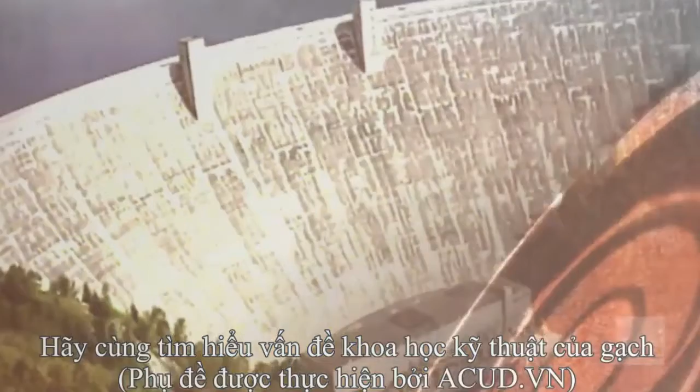It starts off as a simple block of clay. When put into fire, it turns hard like rock. This transformation has made brick a cornerstone of engineering for more than 9,000 years. Brick is virtually everywhere. No other building material is so central to our history. It gives rise to some of the most famous structures from antiquity, many of which still stand in defiance of time. It's mind-boggling in one respect because it's hard to realize that something can last that long.

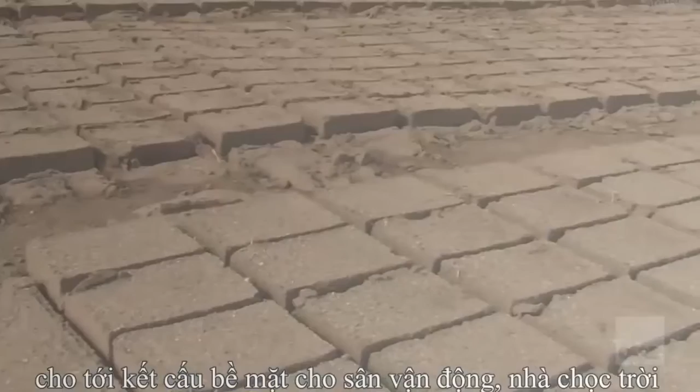When we pick up a brick and we think of how to use it in a modern building, it is automatically linked to the history of brick architecture and the history of city making. Today, brick continues to meet crucial engineering needs, from the strength for everyday structures, driveways, chimneys, homes, to the exterior skin of stadiums and skyscrapers. More than 9,000 years after its creation, brick remains an essential material in construction. I mean, it's an incredible material, brick, and I never cease being fascinated by it. I never cease being amazed at what is done with it.

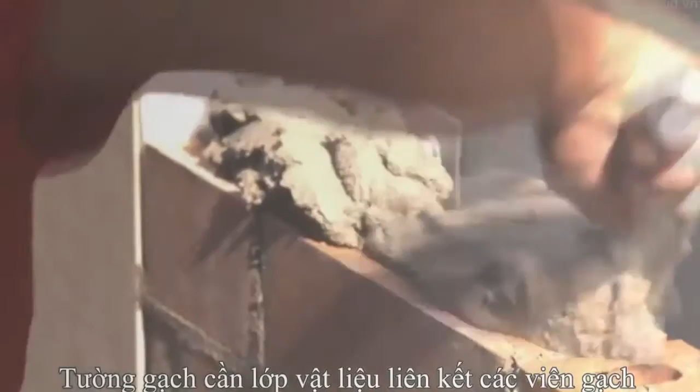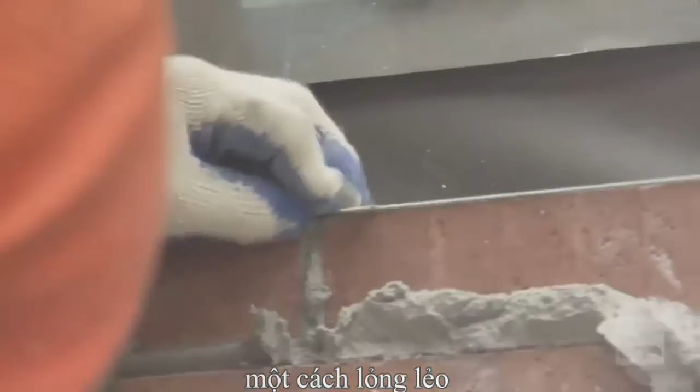Strong, resistant to the elements, virtually fireproof. Brick is prized for its attributes. But brick construction also has a central weakness: mortar. Brick walls need an adhesive agent to bind the blocks together. Without mortar, a wall is nothing more than a collection of bricks stacked precariously on top of each other. Brick and mortar go together like bread and butter.

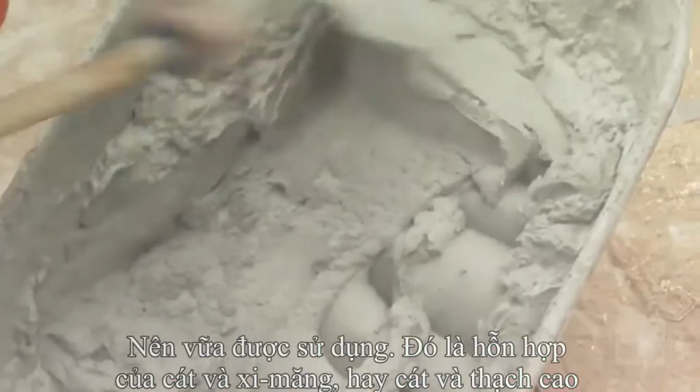You need mortar to lay bricks in because it's difficult to lay them dry and they've no ability to stick together. So one uses mortar, which is sand and cement or sand and lime, an adhesive almost, to keep the masonry units together. Mortar is the glue that holds bricks together, but it is also brick construction's greatest weakness. When brick structures encounter a strong force from the side, the mortar goes under stress. It can begin to crack. The bond with the brick can fail.

Nowhere is this weakness more evident than in an earthquake. The swaying of the earth can cause mortar joints to fail. The results can be tragic. Many of the brick buildings built here in the United States are not reinforced or designed to sustain seismic or earthquake loads. They don't like to be shaken around. They don't like to be moved. They don't like vibrations so much. It's not a matter of if, but when. If it's a major earthquake, most engineers and architects agree that some buildings will fail in some manner.

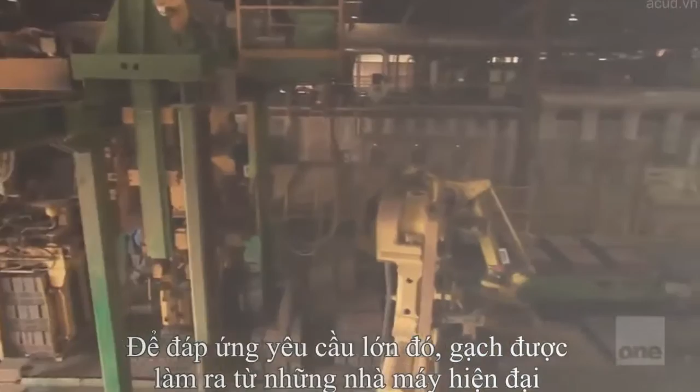Even with this inherent weakness, the demand for this ancient building block continues to grow. Each year, 10 billion bricks are produced in the United States alone. To meet the massive demand, most production is done in state-of-the-art factories. Inside plants like Redland Brick in South Windsor, Connecticut, nearly 50,000 bricks are produced each hour.

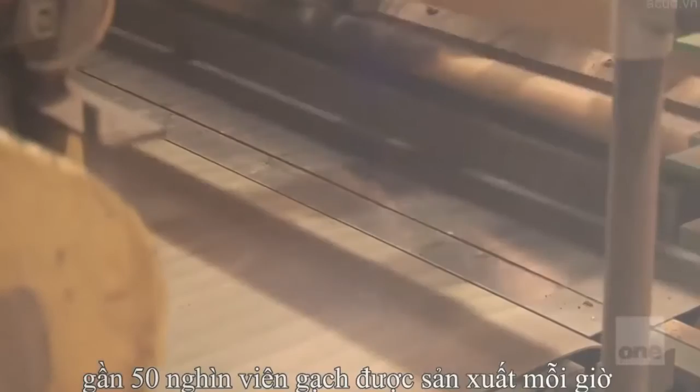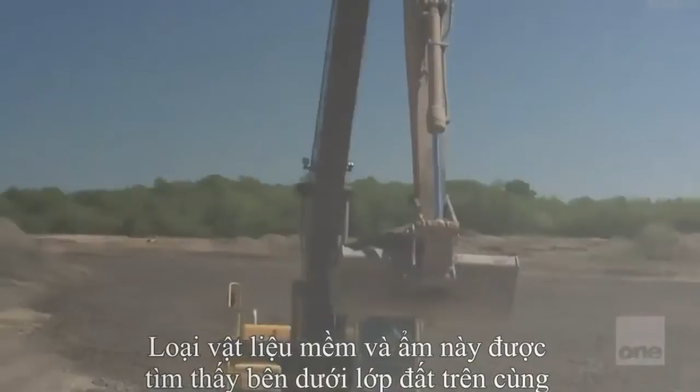While technology now drives production, the basic ingredient for creating brick has been the same for centuries: clay. Clay is the soft, wet earth generally found under the first level of topsoil. It is available in virtually every corner of the world. Clay is the same material that gives shape to pottery. But that does not mean all bricks are the same. Select different clays that contain certain minerals, and bricks can be customized for specific traits of color, weight, or strength. The possibilities are vast.

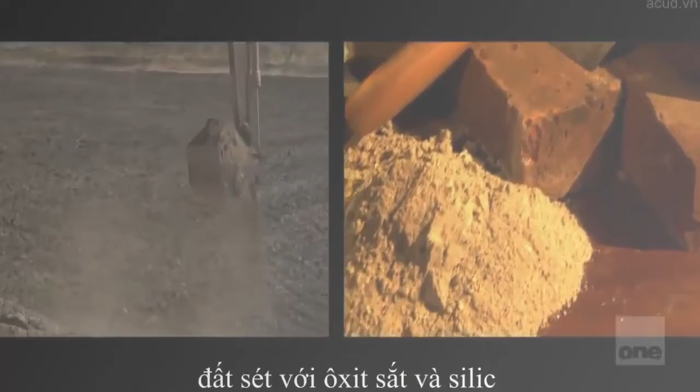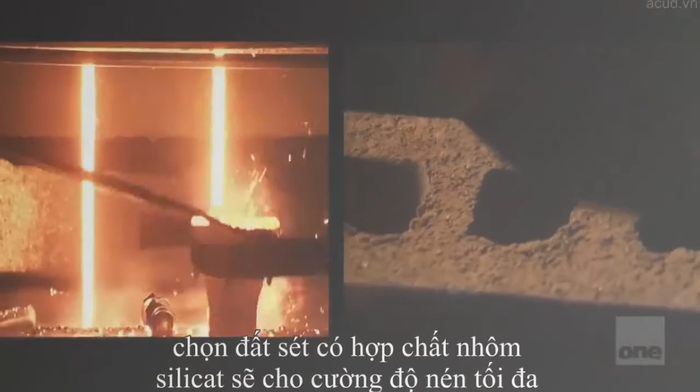Looking for a material that can insulate a furnace? Mine a clay that has iron oxide and silica for maximum resistance to heat. Need a strong material for an industrial factory floor? Select a clay with aluminosilicates for compressive strength. Picking the right clay is a crucial step in brickmaking.

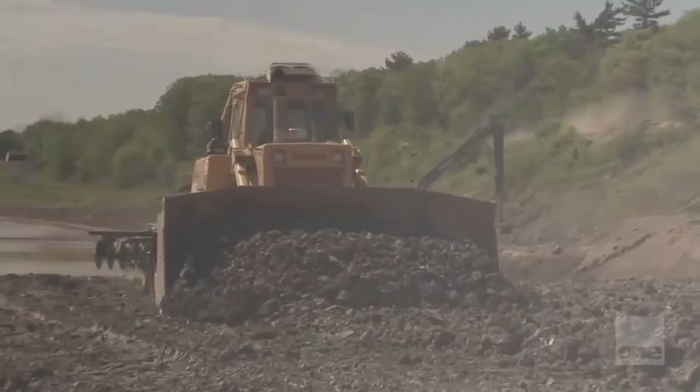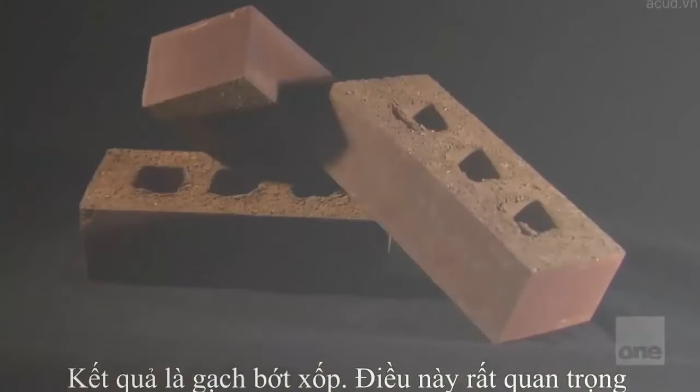Once mined from the earth, clay must be formed. For centuries, humans meticulously created bricks by hand. Today, machines called extruders shape clay. As it's formed, tiny air pockets are pressed out. The result is a block that is less porous. This is crucial. In that process of squeezing that clay out, they actually take the air out of the brick, and that takes out the voids and makes the brick stronger and more water resistant.

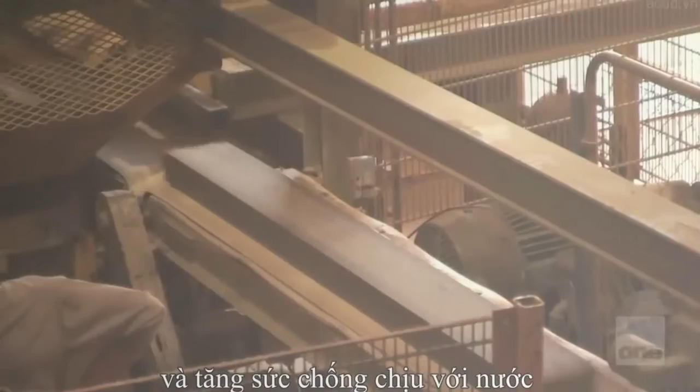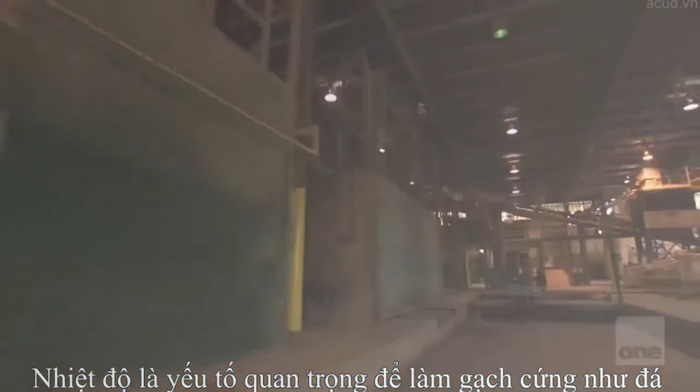But to convert clay into brick, it must be fired. Heat is the crucial element that makes it rock hard. Inside these modern kilns, bricks bake at temperatures of at least 1,600 degrees Fahrenheit. At this heat, a transformation takes place. The moisture content inside evaporates. Clay particles start to fuse on the molecular level. This bonding of particles is called vitrification. It turns soft earth into the solid, rock-hard, essential building tool we call brick.

Firing bricks requires precision. Bake them too hot or for too long, and the clay literally melts. Not hot enough or not long enough, and you've got a fragile, brittle block. Useless. Modern kilns monitor each variation in temperature. This attention to quality ensures that each brick will be strong, durable, and aesthetically pleasing. Now, go back inside the science of brick.

The Great Wall of China. It stretches nearly 4,000 miles. It cuts a path through the heart of a nation. And the strength behind much of this structure, an estimated 3 billion bricks. But this epic barrier almost didn't stand at all. Centuries after it is first built, the wall begins to crumble to the ground. The mud bricks that give it strength are no match for the elements. The edges of the brick would slowly disintegrate, and then the whole thing would basically turn back into mud and go back into the earth where it came from.

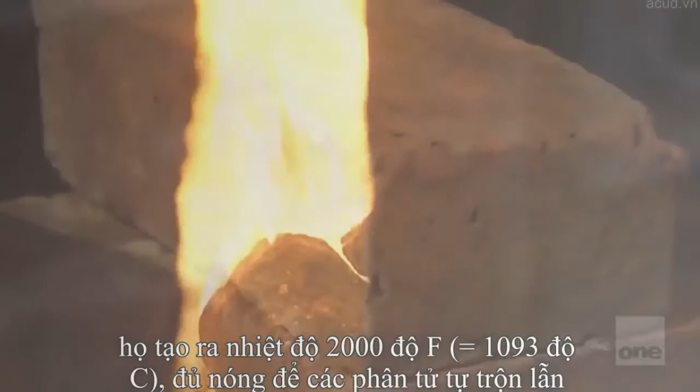To build a new wall, China needs a stronger brick. They turn to a new material, clay. Less porous than mud, clay bricks are more resistant to penetration by moisture. But sun-dried clay will not be enough. They turn to a crucial element, fire. For at least 3,000 years, the Chinese made pottery by firing it at high temperatures in kilns. They decide to employ the same technology to create brick. By firing the clay in kilns, they can heat it to nearly 2,000 degrees. This allows the molecules to fuse. The result is a hard block that is resistant to the elements and is also able to sustain tremendous weight. The Chinese have a formula to rebuild the wall.

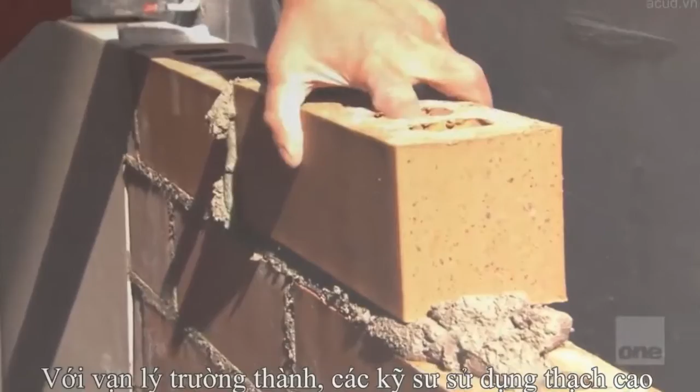The leap here is looking for something much more permanent. What is strange is how long it takes for this step to be made. And it seems to take a very long time for it to occur to people to fire bricks, building material, rather than just bake them in the sun. To give the wall greater strength, the Chinese also focus on how to bind the bricks together. The choice of a strong and reliable mortar is essential. In the Great Wall, engineers select a formula of burnt lime and sticky rice gruel. The two components act like cement, sealing the bricks together. Locals dub it the mortar that lasts for as long as 10,000 years.

Brick by brick, China restores the largest man-made structure on Earth. The wall as we know it today is finally completed in approximately 1640. More than 300 years later, the wall's clay bricks have stood up to the elements. The very stamps pressed into the clay by brickmakers all across China can still be seen in the finished product. The wall stands as a testament to their skill and ingenuity. The Great Wall of China is still standing. It's made of brick, and it's still standing. China employs brick to its full potential for protection.

Across the world, another empire transforms it into a backbone of everyday life. Romans employ brick to erect stadiums, temples, and even bathhouses. Brick has a remarkable quality that it can be used in incremental ways, so it can make an arch. The Romans were really the first to explore this. They were the first to really take it as an intellectual art. How far can we push this simple material? Way past adobe making, but to heroic architecture. Today, this structure still stands as a testament to the power of ancient Roman brick construction. Trajan's Market.

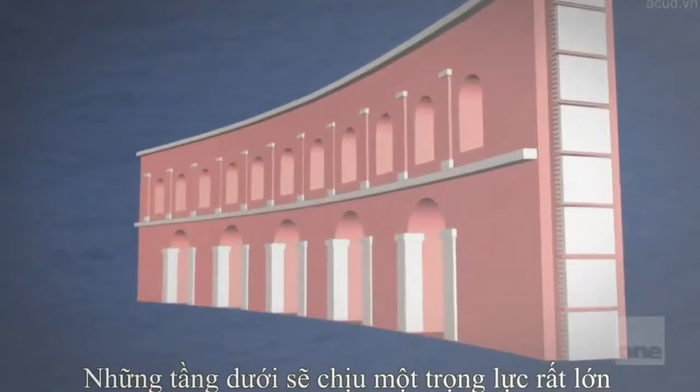The design for the market calls for a 6-story complex. This means the lower floors will bear incredible weight. In the ancient world, brick is the ideal material to support such mass. The brick strength is tremendous. You could stack brick 100, 200 feet tall. It will sustain the weight of itself. You could stack 6 or 8 cars on top of a single brick.

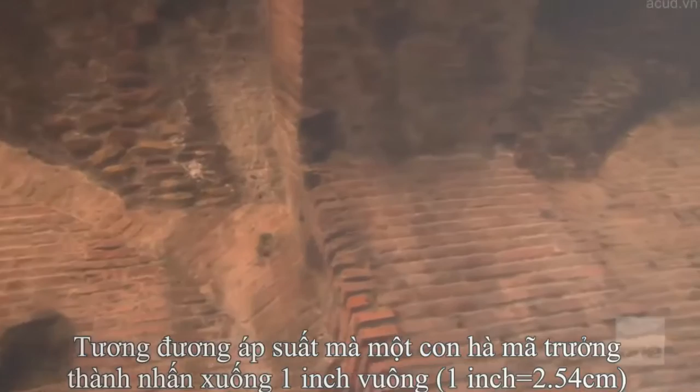It will not crush. The average Roman brick can sustain approximately 5,000 pounds of pressure per square inch. That's the equivalent of a hippopotamus pressing down on every single inch of it at once. Even modern concrete is only required to support 2,000 to 4,000 pounds per square inch.

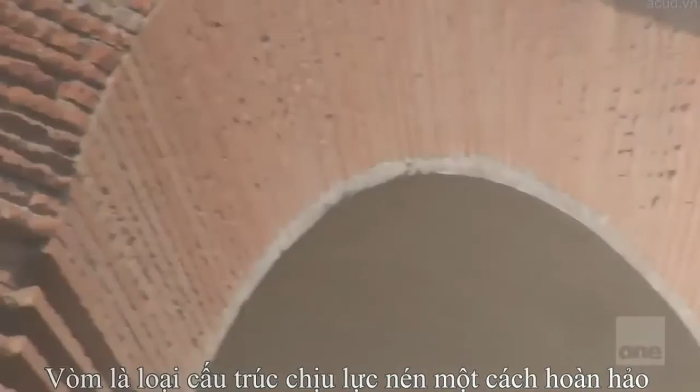To further increase the brick's ability to sustain the load, the Romans turned to another architectural innovation: the arch. When we think of the Romans and how they contributed to brick construction, the first thing that comes to mind is the arch. The arch is essentially a very perfect compression element. It's a very clever way to force masonry to work in compression only.

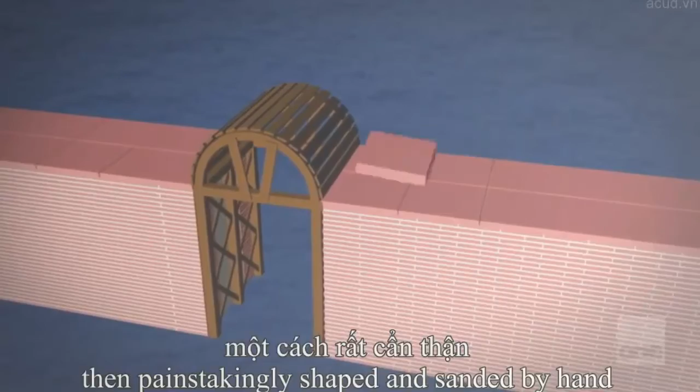To create these arches, bricks are carved into wedges, then painstakingly shaped and sanded by hand to precise measurements in order to fit securely. Nearly 2,000 years later, you can still hardly fit a playing card between the bricks. But the greatest innovation in Trajan's market is a secret inside the walls.

Roman bricks are not the same blocks used by the Chinese. Long and square, they resemble thick tile more than anything else. By cutting these bricks like a pizza into halves, quarters, or even eighths, Romans create a formula for incredibly stable walls. The outside of the wall is straight and flat, but this is just a facade. Behind it is another material that gives it even greater strength: concrete.

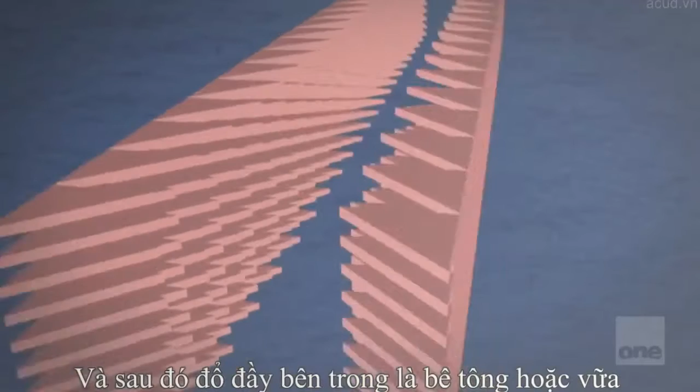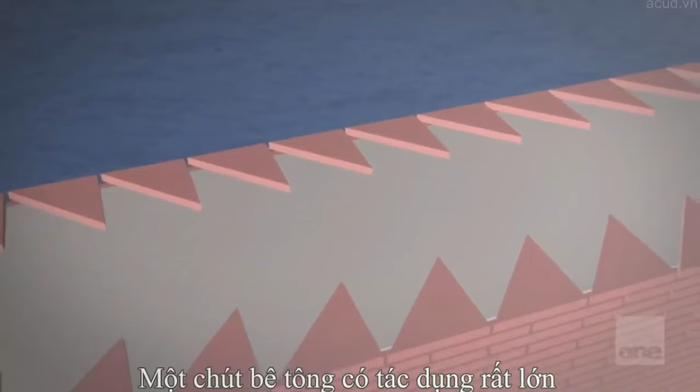They'd use this face brick, arches and stacked brick, and then they would fill the inside of the walls with concrete or grout. The jagged, sharp edges of the brick triangles bond perfectly with the concrete. So each little bit of concrete had a place to put his thumb and forefinger, so it gave it a mechanical retention as well as just an adhesive retention. It's just good engineering. What this did, in essence, is create a composite wall, brick and concrete, and they gained more strength still. Brick's compressive strength combined with the use of concrete allows Trajan's market to become an ancient high-rise.

Now, go back inside the science of brick. London, England. This legendary city turns to brick to overcome one of the greatest disasters in its history. In the process, London redefines how this material will be made and used.

September 2nd, 1666. Flames engulf London. Over 3 days, the losses are staggering. 13,000 houses, 87 churches, and countless businesses. The city lies in ashes. As Londoners clean up the wreckage, they notice something amazing. The flames that rage through the city stop right here.

This is part of the ancient city wall. It is made of brick, and it is entirely unharmed by the flames. In fact, seemingly every time the fire reaches a brick wall, it stops in its tracks. The reason? Brick is fireproof. When clay is fired in a kiln, the particles inside fuse together into a new molecular structure. The result is a rock-hard substance that will not melt unless it is pushed to more than 2,000 degrees.

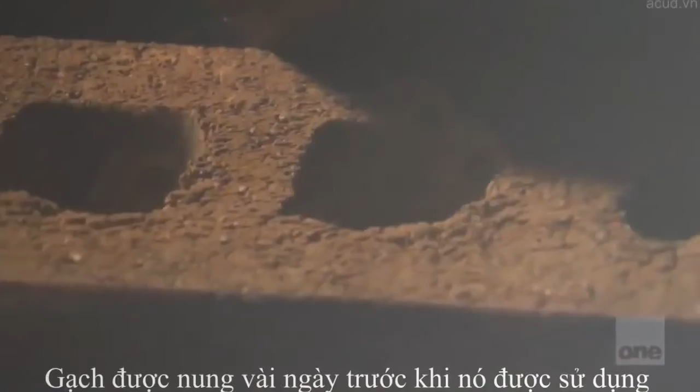In essence, brick is virtually immune to typical fires. It's already been fired in a furnace for days before you ever get to use it. So its properties were actually gained by its thermal sintering of the components together. And so you come along and heat it back up to the kind of temperatures of a kiln, which would not be uncommon in a fire. It sort of says, oh, back in the kiln.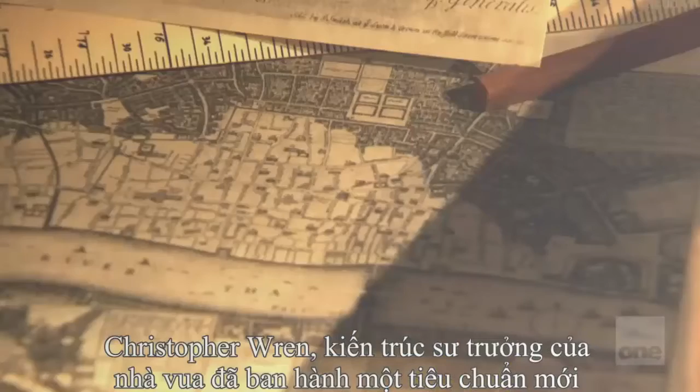In the wake of the London fire, Christopher Wren, the chief builder to the king, imposes new regulations on all reconstruction. Every new building must be made from fireproof materials. London turns to brick. People wanted to use fireproof products that could withstand any kind of catastrophe that would come around. But the city also needs to build quickly.

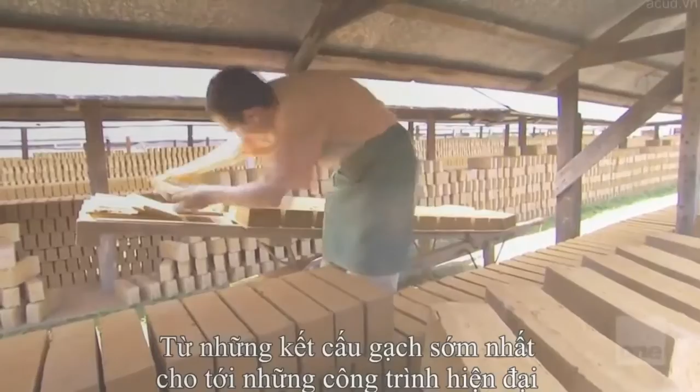Brick construction is incredibly time-consuming. From the earliest brick structures up to the modern day, each building has gone up the same way. Brick by brick, each one painstakingly laid by hand.

Typical square blocks make progress even slower. There's beauty in the shape of the brick, which comes from a supreme economy. Some of the early bricks would typically be square, but square brick isn't terribly efficient. London looks to a different shape of brick, rectangular.

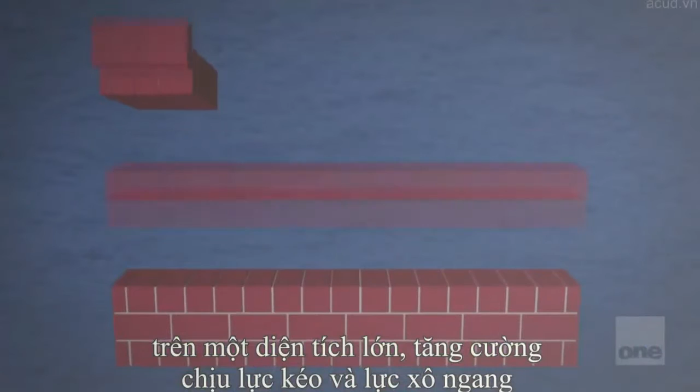Able to fit in a human hand, these rectangular blocks permit masons to raise structures quickly and efficiently. This shape also brings an added benefit, strength. The rectangular shape allows one brick to lay directly across two bricks below it that are facing in another direction. This stacking system gives walls bond patterns that distribute weight over a larger area, increasing both compressive and lateral strength. From churches to hospitals to private homes, brick restores London to a great world capital.

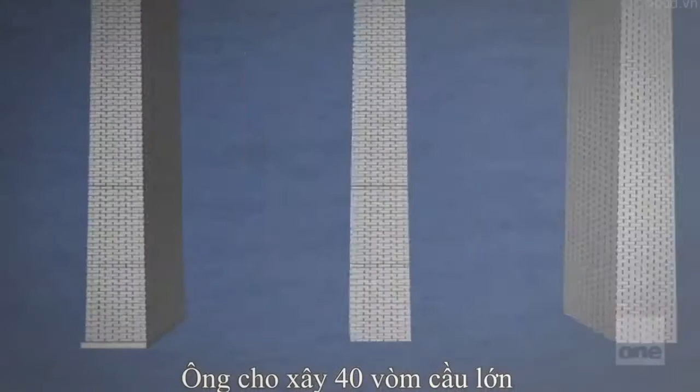England, mid-1840s. Renowned engineer William Cubitt sets out to run a rail line from London north to Edinburgh. In the way is an enormous obstacle, the Mimram Valley. Cubitt looks to an engineering masterpiece for inspiration. He elects to use 40 massive arches modeled directly after the Roman aqueducts to span the distance. The strength of the arches will permit the viaduct to carry great weight with fewer bricks for construction.

After just 2 years of construction, the viaduct opens in 1850. It quickly begins to buckle under the train traffic. As the use of brick developed and major cities wanted to use it for projects like viaducts and bridges, they discovered that brick has its weaknesses. They don't like to be shaken around. They don't like to be moved. They don't like vibrations so much. In essence, each train is like a mini earthquake, slowly shaking the bricks side to side, causing them to crack. Engineers need a new solution.

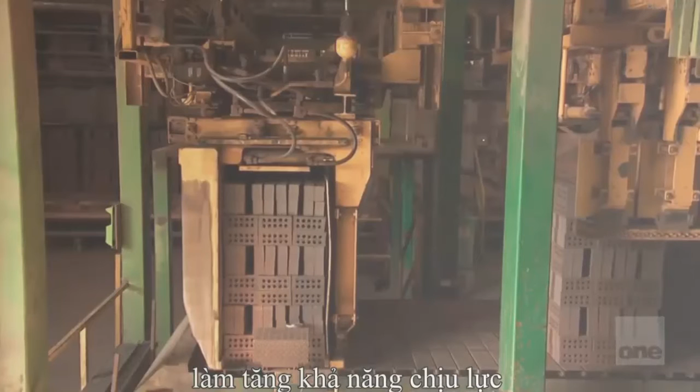The answer lies in a completely different kind of brick, engineering or pressed brick. All bricks have tiny pores or air pockets that can act as weak spots when they encounter force. Engineering brick is made by mechanically pressing the clay to be less porous, increasing strength. Well, engineering bricks came about largely because of the railways, where there was a need for a brick with compressive strength. In 1930, engineering brick is used to reface the entire viaduct. More than 150 years after it's first erected, Digswell continues to provide safe passage between London and Edinburgh.

Now, go back inside the science of brick. It stretches half a city block. It stands nearly 200 feet tall and is composed of almost 600,000 bricks. The Monadnock Building in Chicago is a landmark in American architecture. When it opens in 1892, the Monadnock is hailed as a marvel of engineering. Today, it represents something very special in the history of brick, its downfall. The Monadnock is the last all-brick high-rise in the world.

In the mid-1800s, a new invention is revolutionizing the world, the elevator. People can now travel up and down with great ease. Architects start to think in a new way, vertically. Chicago embraces the trend. Recovering from a devastating fire in 1871, much of the city is rebuilt in fireproof brick. Brick's ability to carry heavy loads also makes it a logical choice to erect the high-rise.

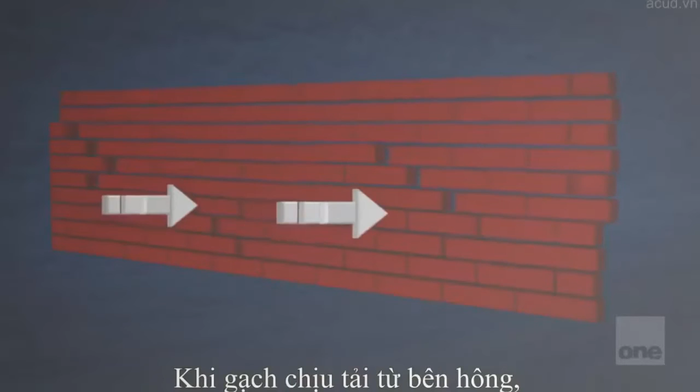To erect a building to such heights, engineers need to conquer a crucial problem: brick's lack of lateral strength. When a brick wall encounters stress from the side, the mortar holding it together can fail. Some engineers at the time believed that any brick building over 10 stories will get knocked over in a strong wind. How will the Monadnock combat the legendary Chicago winds at 16 stories? The answer seems simple. Add thickness to the walls.

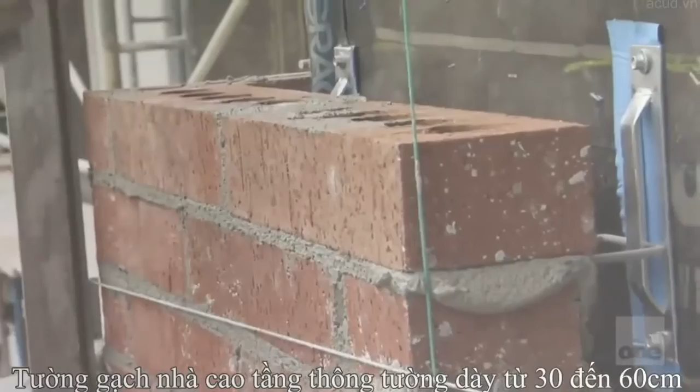Walls in an average brick building are usually 1 to 2 feet thick. For the Monadnock, engineers triple that to 6 feet thick on the ground floor. But the apparent solution creates a tremendous problem. The completed Monadnock weighs an estimated 50,000 tons. The building is so heavy, it begins to sink. The Monadnock is designed to showcase brick's potential for high-rise construction. Instead, it highlights the material's limitations.

Just 2 years after the Monadnock opens, an addition is made. Another massive building stretching half a city block. The new structure seems identical to the original, but beneath the brick is a secret: a steel frame.

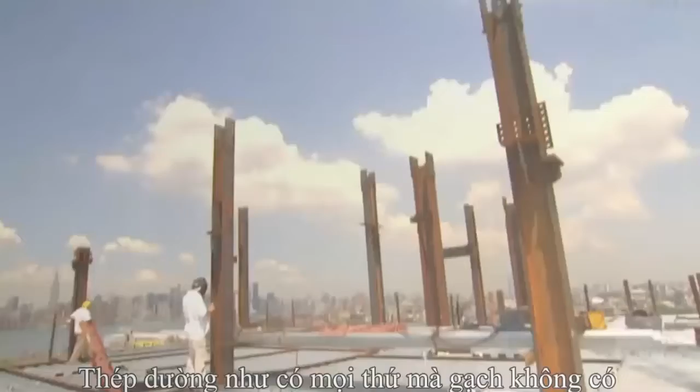In the 19th century, the mass production of steel emerges and changes the face of construction. Lightweight, flexible, and strong under lateral stress, steel is seemingly everything brick isn't. Steel permits the frame of the addition to be much thinner and lighter than the walls of the original.

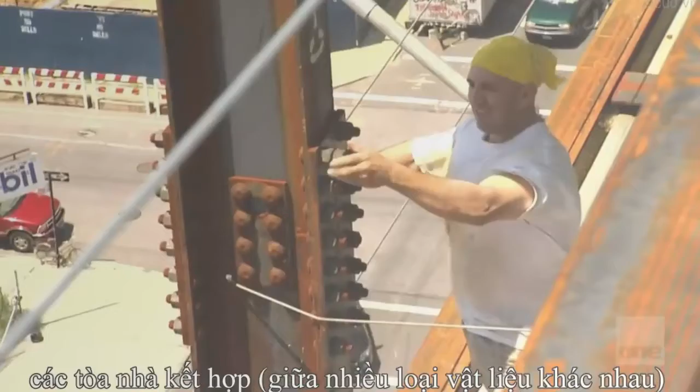The addition to the Monadnock represents a new chapter in brick construction: composite buildings. Steel gives architects a new tool to build higher, stronger, and faster. As buildings soar ever higher, brick takes on a new purpose: aesthetic beauty. It is really, really, really thick paint that lasts a long time. And because of its traditional look, there's a great many people who prefer the aesthetics of the brick.

The Chrysler Building, with its wonderful Art Deco top in New York, is clad in 3 million blue-glazed bricks. So brick ceases to be used as a structural material, but it retains great importance as a decorative cladding. Before, we used brick as the load-bearing element, and there was something covering it, and brick was the sort of utility part of it. Nowadays, though, brick is now the aesthetic part, and behind the brick is some type of steel or concrete frame, which is taking all the load.

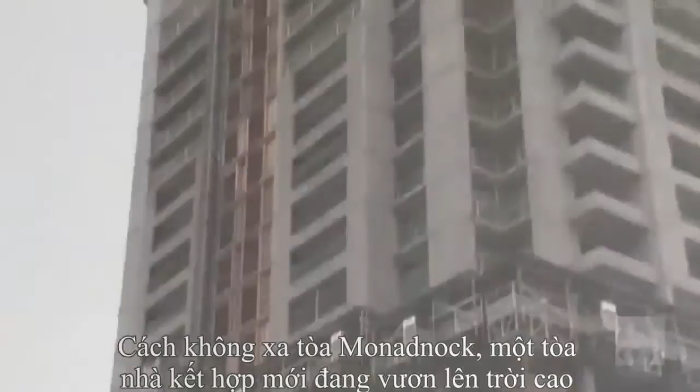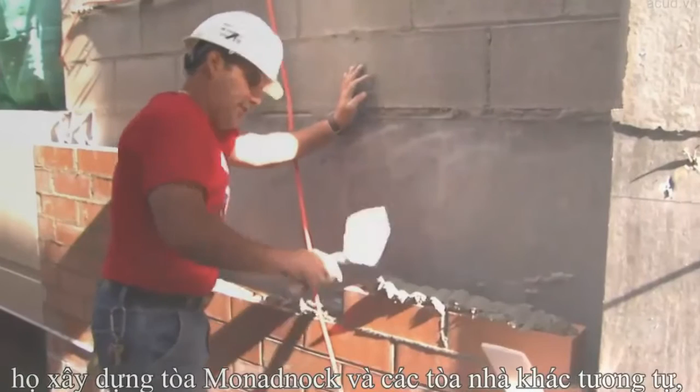Back at the turn of the century, when they were building the Monadnock building and other buildings like that, architects and builders were limited to how high they could build the masonry. Today, we've got the Columbian, it's 50 stories high. Same material, brick, on the outside. And while a lot of the construction has changed and a lot of the design aesthetic has changed over the years, brick absolutely has a timeless quality about it.

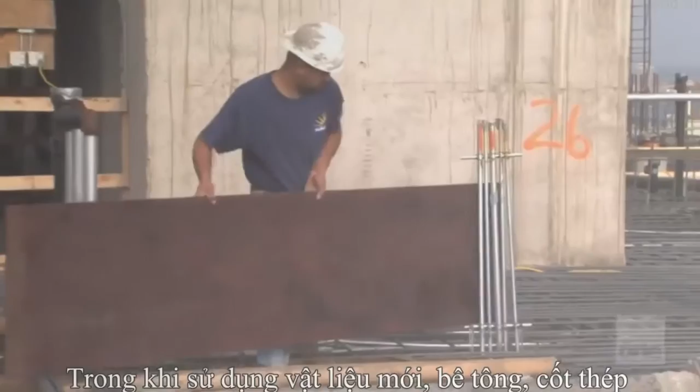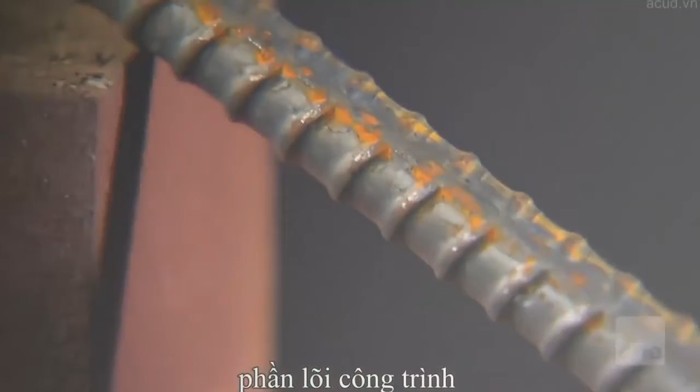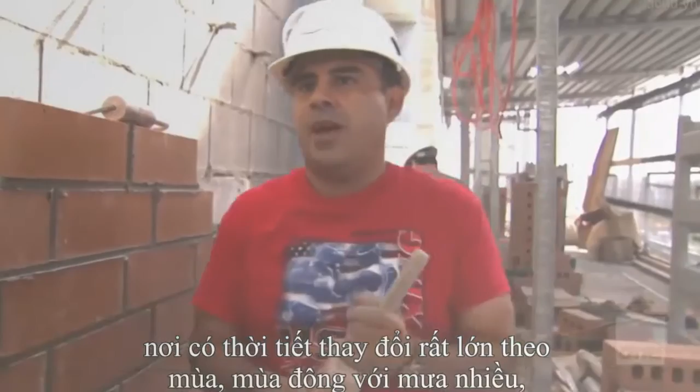While using the modern materials of steel and concrete allows engineers to build stronger and faster, modern composite buildings bring new challenges. In composite buildings, moisture can collect between the internal structural walls of concrete and steel and the brick exterior. The result can be erosion and decay at the core of the building. Eliminating that moisture is crucial. We need a drainage system for these walls, considering that we're in the northern part of Illinois where the weather changes dramatically from winter to rain, and then we have the real hot summers and the fall and the moisture.

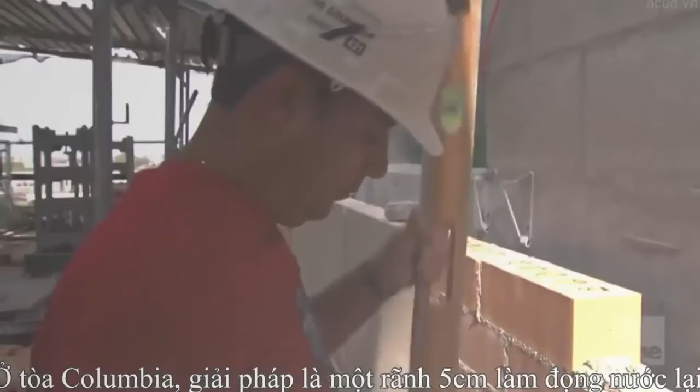In the Columbia, the solution is a 2-inch cavity wall that collects the water and drains it away from the building. The technique bricklayers use to make this happen is an intricate one. Before starting a row of bricks, the mason sets down a steel shelf that is covered with a rubberized waterproofing surface. He places a piece of rope in the mortar between bricks. This will act as the wick to carry the water away from the interior wall. The water will be safely carried outside the building, where it can't do any damage.

Composite buildings permit brick to soar higher than ever before. No longer bearing the structural load, it is the beauty of brick that allows it to survive in the world of modern construction.

Now, go back inside the science of brick. Strong, durable, virtually fireproof. Bricks have been a cornerstone of engineering for nearly 10,000 years. But when brick construction goes bad, the results can be deadly. As brick construction ages, the mortar that binds the bricks together can wash away. Without regular maintenance, once solid brick walls can become death traps.

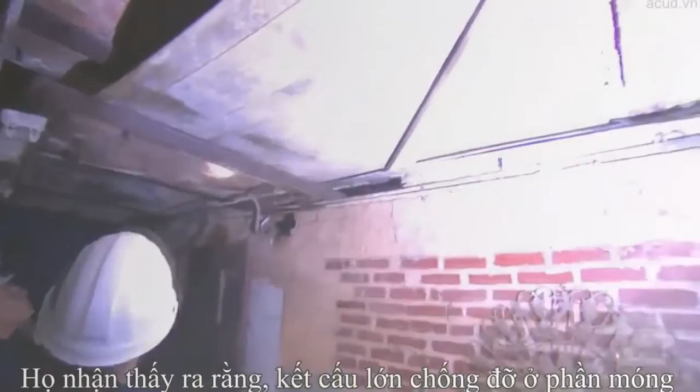They discover that the huge structure is supported on a base of brick arches. How is the mortar here? It's okay. It's stable. It's drying. Amazingly, the 120-year-old masonry is holding firm. It is the steel-reinforced beams that show the most decay. No, the steel here is flaking on the... To do a complete rehab, these aging metal beams must be reinforced or replaced.

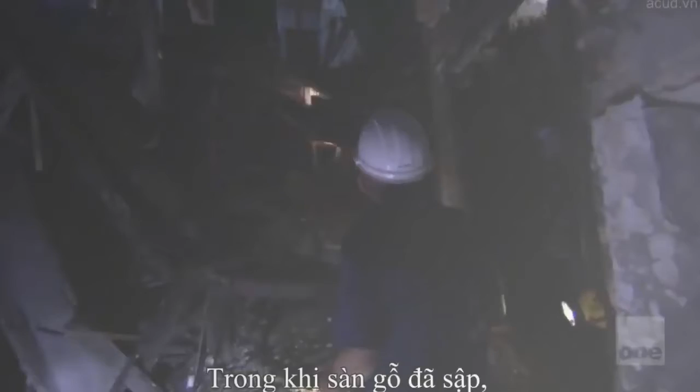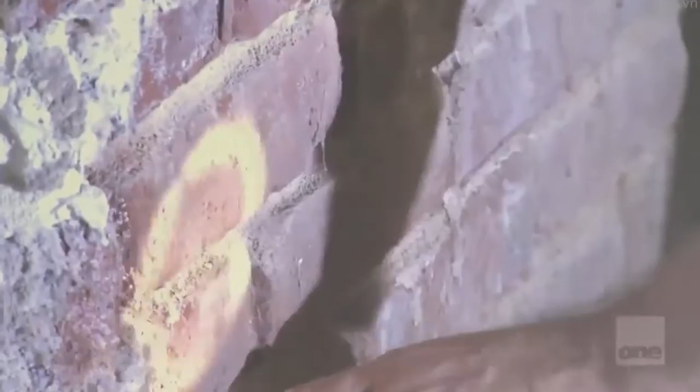Very careful, of course. Visiting the upper part of the building poses a special risk from ceiling collapse. Any misstep here could be deadly. Second floor joists are collapsed in this area right above us. While the wooden interior floors have collapsed, the building's brick walls remain solid. And the wall seems pretty acceptable from the interior, but crucial mortar shows signs of decay. The mortar is just, you can remove it with the finger. To make this building habitable once again, these gaps must be repaired.

The team's evaluation today is that the buildings are a hazard, but their brick frames essentially sound. The final decision to restore or rebuild can now be made by city officials. I believe the buildings can be brought back relatively easily. It's commonly done. We have one right here behind us. We have the original version of the building which has been restored, and right beside it we have a 100-year-old neglected, abandoned six-story walk-up.

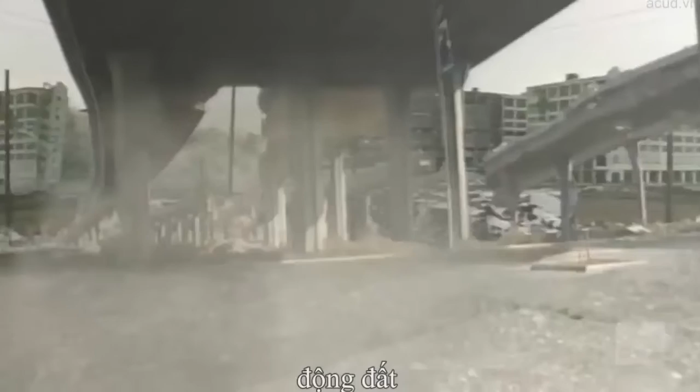But from the earliest brick construction up to modern buildings, these structures have all faced a lethal enemy. Earthquakes. When the earth starts to buckle, bricks' inability to move from side to side with the quake can bring them tumbling down. And when the ground shakes and a building tries to follow the ground, some parts of the building go into tension and some go into compression. The parts that go into compression, not a problem. But the parts that go into tension, really bad news. Now, go back inside the science of brick.

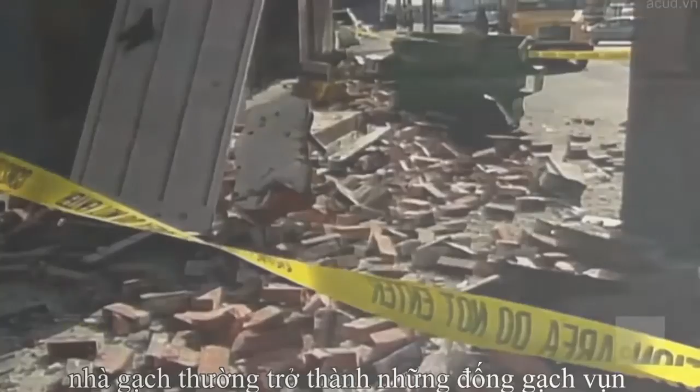From San Francisco to Los Angeles, to Iran, to the Philippines, the picture repeats itself. In the aftermath of a seismic event, brick buildings are often reduced to piles of rubble. A primary victim of earthquakes are buildings with traditional brick construction. With no steel or other reinforcement, their structural stability can fail with a strong enough force. And even in modern composite buildings, bricks can crumble in an earthquake. While steel and concrete keep the core of the structure intact, the brick facing falls away.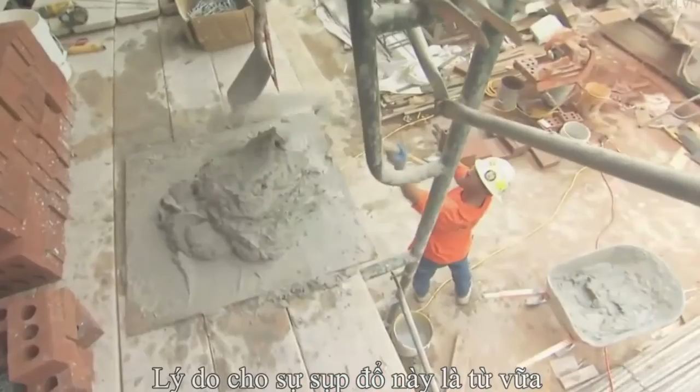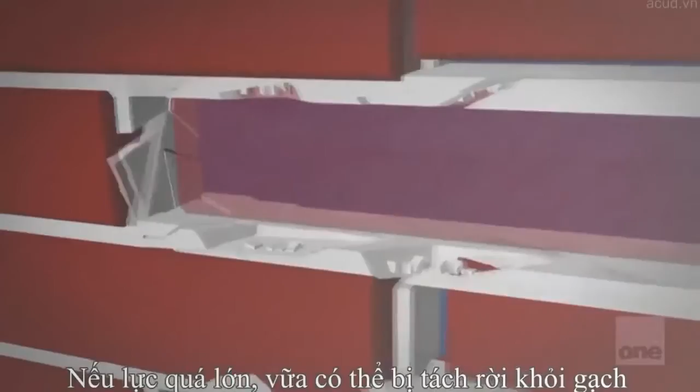The reason for the failure is simple: mortar. Mortar is brick's Achilles heel. When a brick wall encounters a violent lateral force, the mortar holding the bricks together starts to crack. If the force is strong enough, the mortar separates from the brick and the wall comes apart. Not only will you see piles of brick on the ground after an earthquake in news footage, but you'll see half the bricks look like they could be sold in the garden store tomorrow. I mean, there's not even any mortar sticking to them. They're just bare bricks sitting there. For decades, engineers have been seeking to solve the weakness of mortar joints.

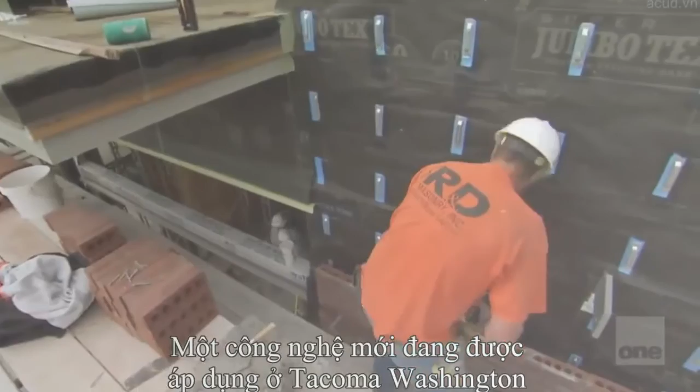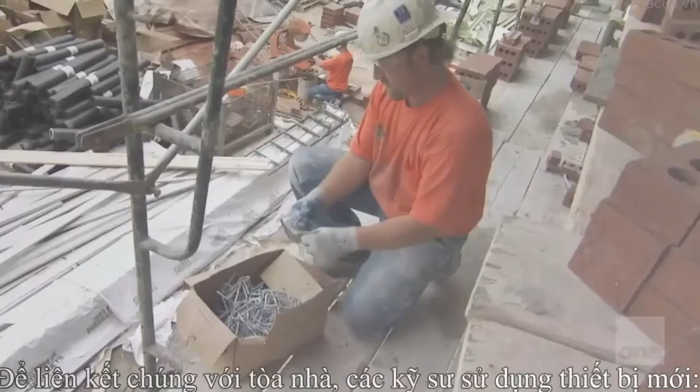A new technology is currently being employed in Tacoma, Washington. When completed, this 6-story building will provide apartments to faculty and students at the University of Washington. Erected with a central core of steel and concrete, the building will be faced with more than 10,000 bricks. To secure them to the building, engineers are using a new invention: the seismic tie. Made of steel, the ties literally attach the bricks to the interior concrete and steel structure of the building.

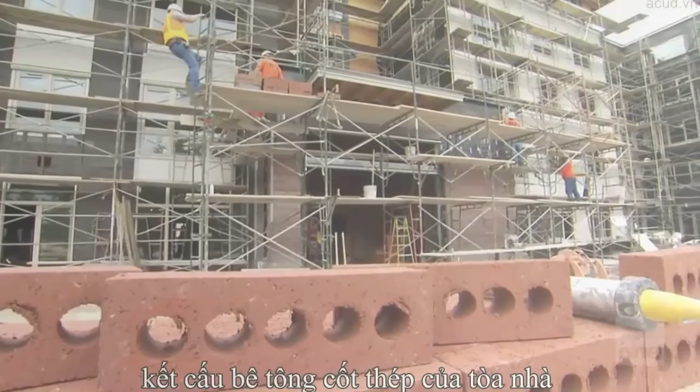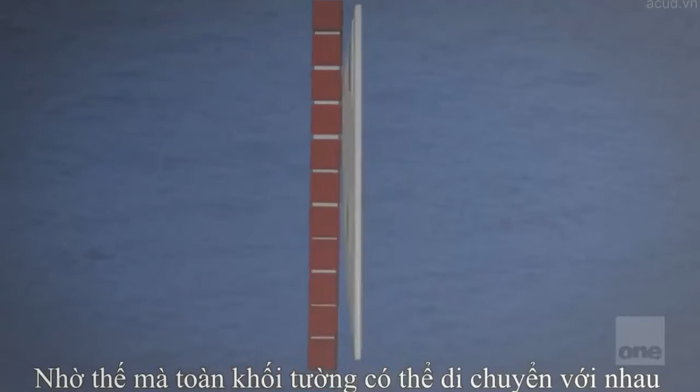The ties we're using are attached like this, and then the 9-gauge wire nestles into it, which allows the building to move different from the masonry. The masonry can shift up and down this much compared to the backup of the building and still be attached to the building. The ties permit the brick walls to move independently of the primary building during a seismic event, but still remain attached. Thus, the mortar and bricks are able to move in unison, eliminating the tension that causes them to break under force.

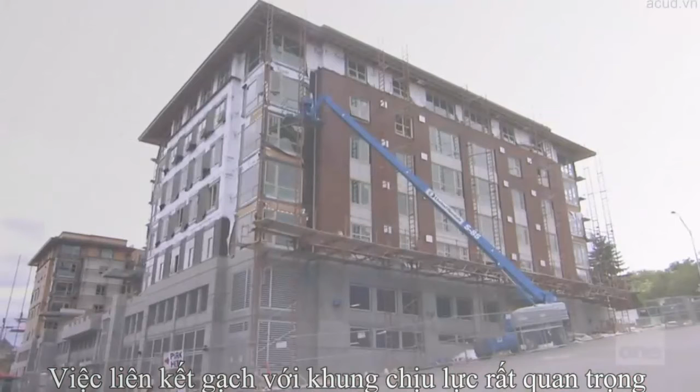Securing the brick to the structure of this building is crucial. Tacoma and nearby Seattle sit directly on a fault line. February 28, 2001, 10:54 a.m. The Seattle region experiences a shock registering a magnitude of 6.8. Many of Seattle's landmark brick structures suffer severe damage.

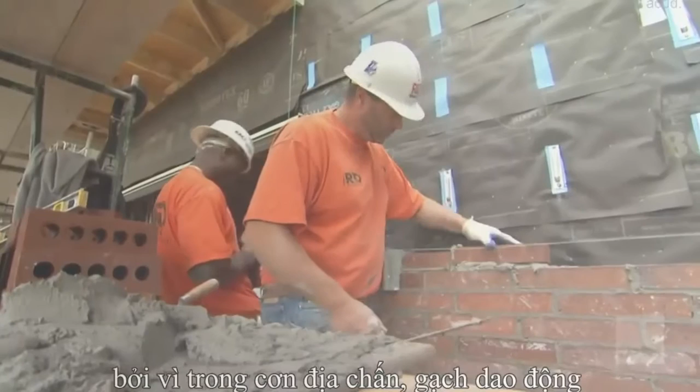Brick mason Jim Reynolds is working on a construction site when the quake hits, but it's one equipped with seismic ties. The new buildings we were working on had masonry veneer. Because of the seismic attachment, the brick just undulated with the wave-like motion of the earthquake. The seismic tie has great potential for new construction. But what about existing brick structures?

There are countless brick buildings in earthquake zones all across the country. But if reinforcement isn't done, many of these buildings are little more than sitting ducks. If we fool around with structures that we know are seismic liabilities and wait long enough, nature will take care of the problem for us. In many instances, adding steel or concrete or installing seismic ties is costly or impossible.

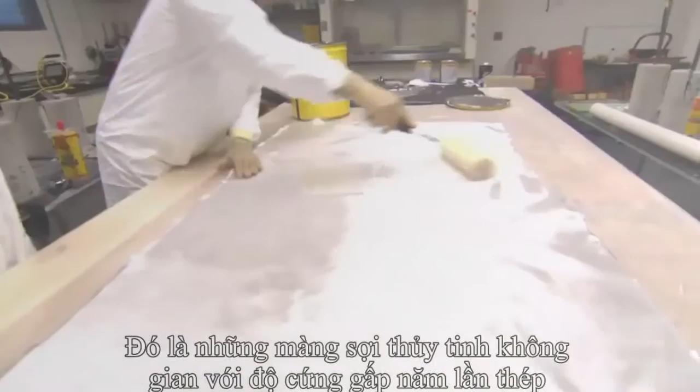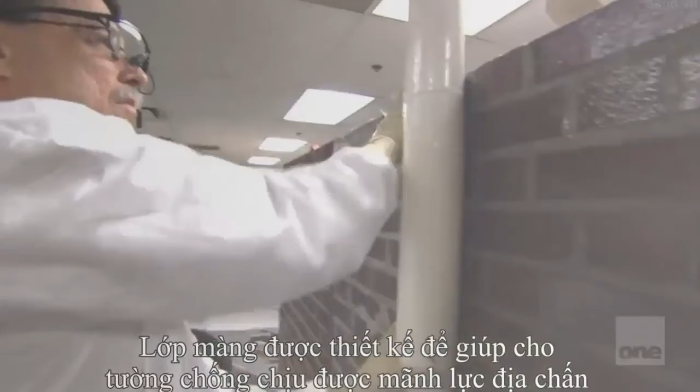But a new technology is attempting to solve the problem by reinforcing brick from the outside. It's a space-age fiberglass fabric with 5 times the strength of steel. This fabric can permanently bond to brick with a special epoxy. The fabric is designed to help a brick wall survive the force of an earthquake.

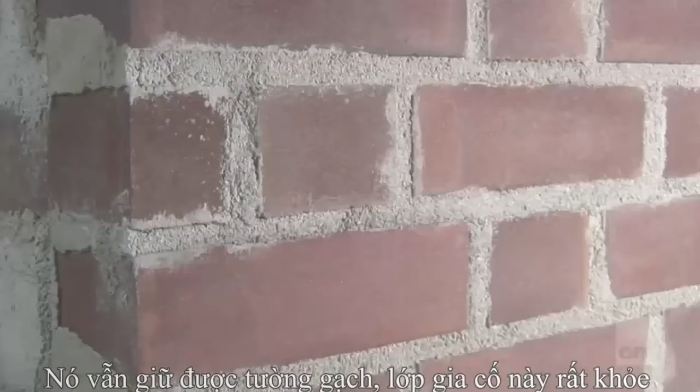You're combining the positive attributes of a brick wall, which are very good in compression, with the positive attributes of composites, which are very good in tension. A properly adhered and bound building won't drop its brick on bystanders in a seismic event. You still preserve the brick. The epoxy reinforcement is very strong.

In this test, the sledgehammer simulates the same type of violent force a brick wall encounters in an earthquake. When the sledgehammer strikes the side of the wall that has not been treated with the fabric, it crumbles. Strike after strike, the mortar and bricks fail. Brick by brick, the wall collapses.

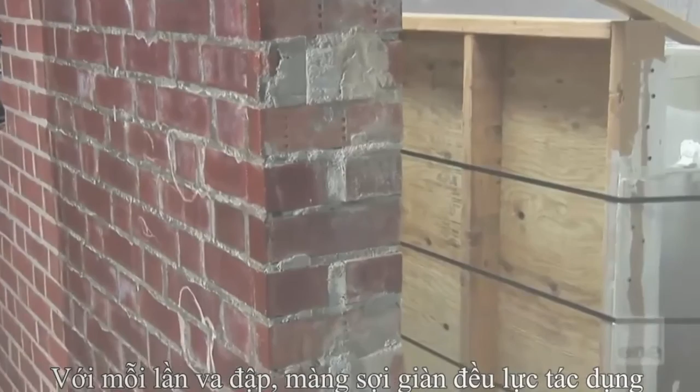On the side of the wall treated with the fabric, the results are incredibly different. With each strike, the fabric disperses the force. The bricks and mortar are held securely in place. This fabric has incredible potential. It could provide greater support and safety for countless unreinforced brick buildings around the world.

For nearly 10,000 years, brick has given shape to our world. From simple blocks of mud, to composite buildings, to space-age technology. Human ingenuity continues to reinvent brick, keeping this ancient creation on the cutting edge of modern construction. But this material's greatest attribute may be our long connection to it.

I think brick has a unique quality. We almost sense in our bones its history. It's a material that we just understand. It makes us feel good. When buildings are made out of brick, we feel good. It's an incredibly aesthetic and beautiful material. People are comfortable with it. They like to see it.

They like to look at their building and feel like it's strong. It's a product of the earth, and we understand it returns to the earth. So it's one of these materials that just makes sense. If brick is anything, it is a material that continues to adapt. Today, it is responding to the emerging challenges of our world, and it's helping to lay the foundation for our future.